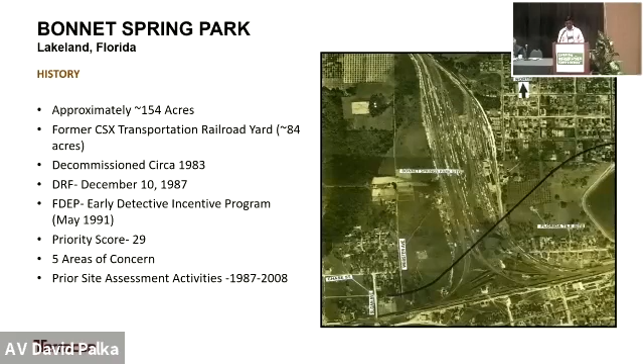A lot of assessment was done from 1987 to 2008, and after that the site was parked. In 2017, Terracon, as the agency term contractor for DEP, was assigned the site under the petroleum restoration program. So Terracon got the site in 2017, and we started the assessment after doing the historical review. You can see the aerial from 1980, which includes the former railroad yard, and also from 2019, which is pretty much before the redevelopment.

You can see the former railroad yard and the 5 areas of concern, which include the former mill house area, former refueling area, an oil water separator area, a former diesel shop, and the former AST area, all at the bottom, the southern end of Bonnet Spring Park.

On the southern portion, there is a pond, which was bought out by DOT and redeveloped. So the property has changed over a period of time, and the boundary limits of Bonnet Spring Park also changed. Terracon went and did the assessment in all 5 areas of concern, for delineation purposes.

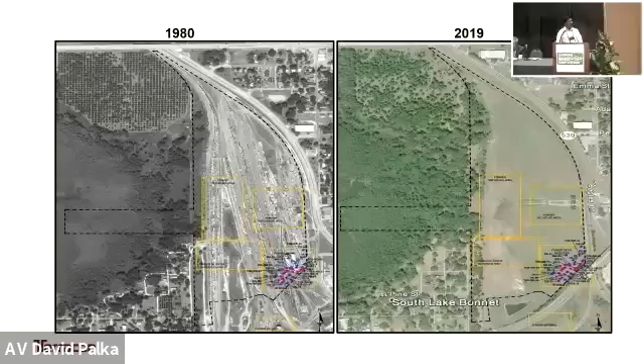We submitted a site assessment report to DEP, and we recommended closure of the former refueling area and the mill house area. For the former AST area, we could not do further assessment because of access limitations to the property, which we could not address within the existing purchase order.

With the oil water separator area, we had to do remediation. But of all the areas of concern, one of the biggest stumbling blocks for us is the former diesel shop area, because the proposed redevelopment includes the welcome center building, which overlays the former diesel shop area. Our focus changed because the client and the developer wanted us to clean the site for them to redevelop the property.

So moving forward, my presentation focuses just on the former diesel shop area and how we addressed the contaminants of concern, secured funding for the cleanup, and assisted with the redevelopment of the welcome center building.

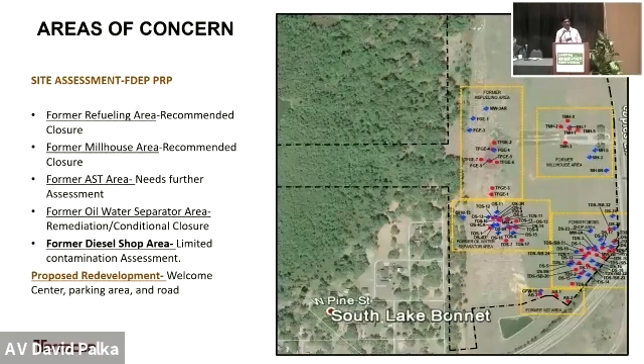Here you can see Bonnet Spring Park looking east at the whole property after grading. You can see the small circle toward the east property boundary, adjoining the railroad yard - that's the former diesel shop area.

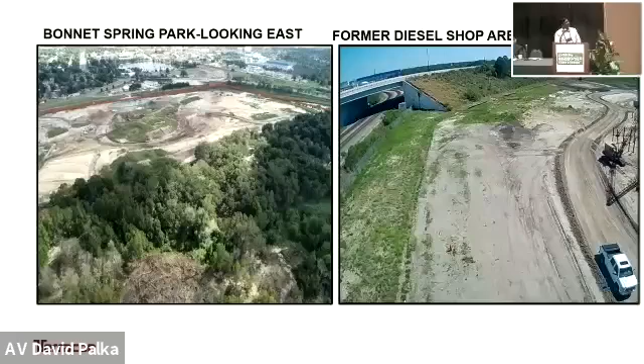And there's another drone shot, a closer shot, looking south at the former diesel shop area.

We did the assessment more specifically in the diesel shop area. We advanced 26 soil borings to 35 feet, to the depth of the monitoring wells, and screened the soils. The contaminants of concern are typically TRPHs.

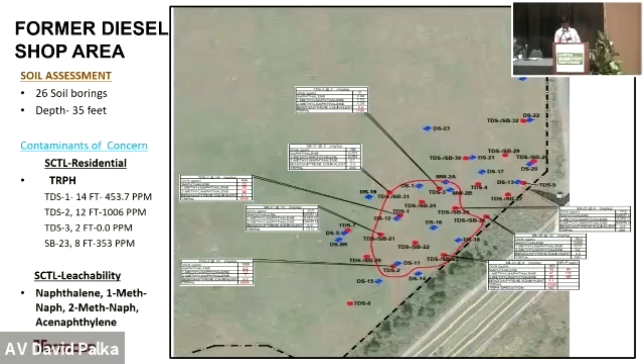That's the plume. For groundwater assessment purposes, we advanced 18 monitoring wells to a depth of 35 feet, with a 20-foot screen interval from 15 to 35 feet, because the depth of water is wide ranging, like 17 to 23 feet. So in order to capture the groundwater table, we used a 20-foot screen.

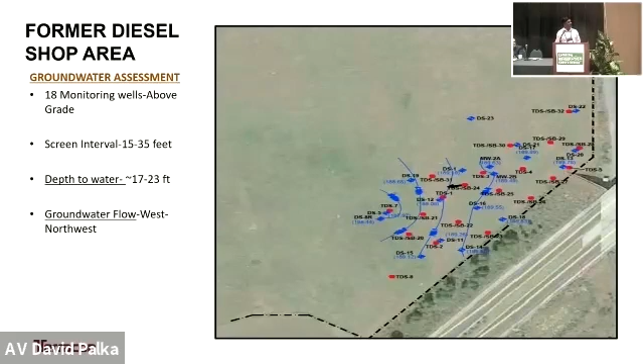We conducted a top of casing survey, and the depth of water is like 17 to 23 feet, and the groundwater flow is pretty much west-northwest.

We analyzed for contaminants of concern, typically TRPHs, because it's typically a diesel shop area, and we have benzene exceeding the GCTL. This is the plume specifically for the diesel shop area.

You can see the property boundary line joining the railroad. Our contamination assessment is limited because we cannot go offsite, as the property on the other side is still owned by CSX, and it's very challenging to get an offsite access agreement for us to proceed.

So since it's time consuming and we are tied to the redevelopment process, we went ahead and gathered enough information to proceed with the remedial approach.

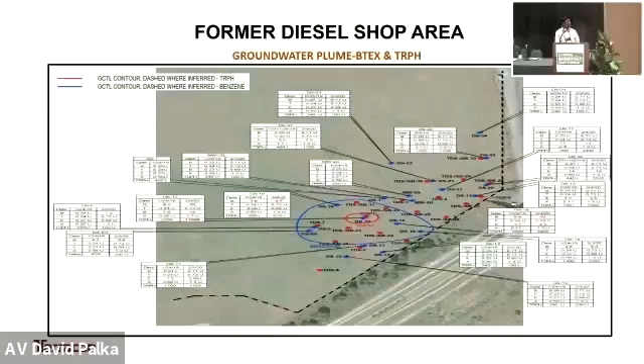Here you can see the PAHs plume. The blue is more like natural attenuation default concentration, and the green, red is pretty much typical GCTL for PAHs. As you can see in the soils, the SCTL leachability for naphthalenes is very, very high, and that reflects on the groundwater - that's the plume for the naphthalenes.

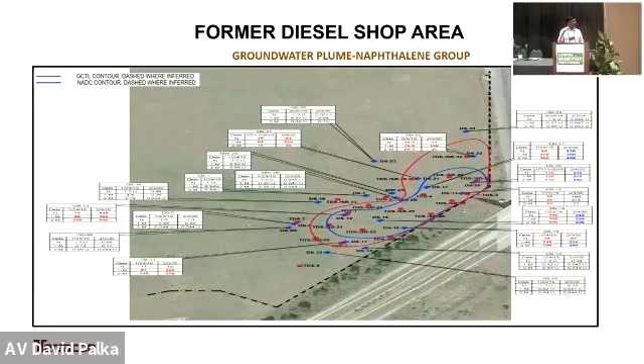We overlaid the proposed welcome center building, the parking lot, and the road over this hydrocarbon plume. You can see the welcome center building, the parking lot, and the roads overlay the plume.

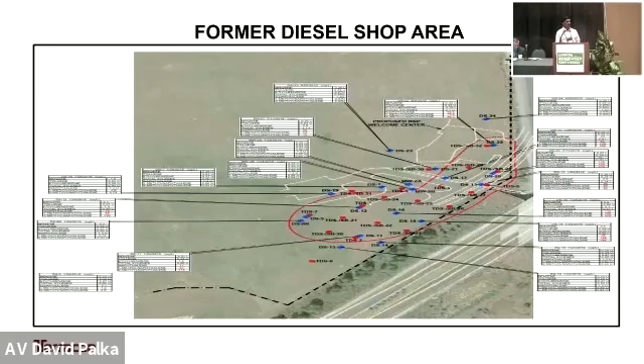We took the whole data and presented it to our client. This includes the lithology.

You can see the wells were installed at a depth of 35 feet on your screen, and the depth of water is 17 to 23 feet. The lithology includes silty clay, clayey sand, and sandy clay, all the way to 35 feet.

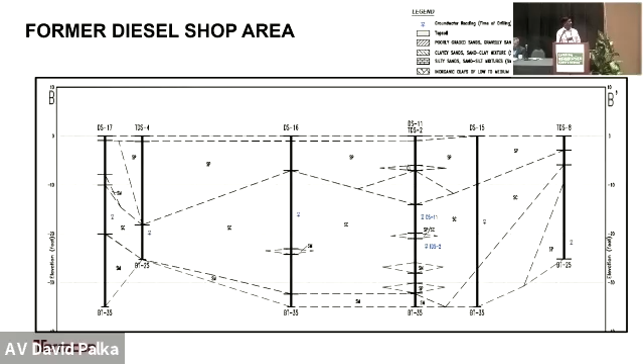Terracon is working for DEP under the supervision of Polk County, and Geosyntec is working for Bonnet Spring Park. So we had a meeting along with Geosyntec and Terracon, including our PE, Donna Klein, with Bonnet Spring Park CEO Bill Tinsley, and also Mr. David Bunch, and presented our findings.

And the first thing they ask is, okay, how can I help you? Help us, more specifically with the funding and the timeline. And they said, if you're going to do any remediation, it should be completed by end of summer 2020.

So we have experience working under FDEP Advanced Cleanup for Redevelopment Program. So we weighed our options. Typically if you go under the FDEP PRP program, since we're the agency term contractor working under the supervision of Polk County, to get remediation of about $350,000 you need to have E-quotes, so that's time consuming. And then we need multiple purchase orders. And the PRP code has limited funding, especially with COVID, the score went up to 65. So had we gone that route, we would not even be funded because the site score is 29.

So we went with the FDEP Advanced Cleanup for Redevelopment Program, which just started in 2017. Under the FDEP ACR program, typically the amount allocated for remediation of any site is up to 1 million for the applicant, and it's one purchase order with no deductible, but it's first come, first served basis. It's not like you submit and you get approved, it's first come, first served. And the program is limited for each fiscal year to $5 million per year, so when you submit the application you have to be within that funding limit of 5 million.

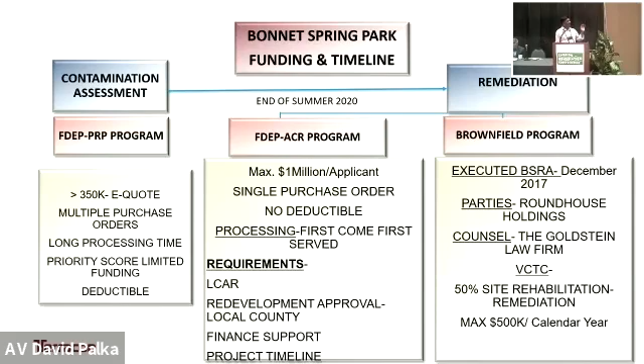So then we thought, okay, this is a good thing - we can have ACR and Brownfield tied together because the cost estimate is 1.2 million. So if approved, we can get a different 1 million for the redevelopment program, and the remaining costs can be claimed as a credit under the Brownfield for that calendar year.

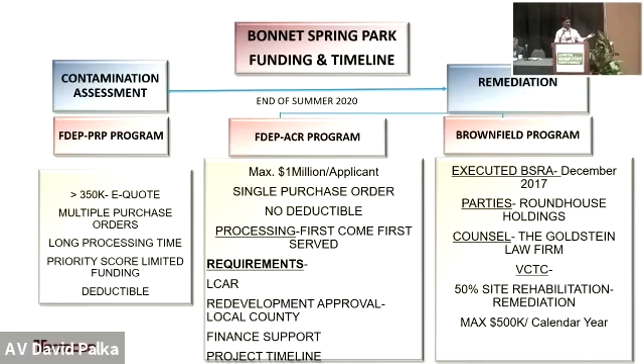So finally, we got a PO in January 2020. We reached out to Matt and Graham from DEP, and Bobby Scarborough and Natasha, expressing the timeline because the redevelopment owners got the permits and are ready to get started. When we conveyed the urgency, they expedited the whole process and had the agreement in place in January. Within 2 weeks of issuing the agreement, we had a PO for 1 million, which includes 8 milestones covering all the remediation cost and 4 quarters of post-remediation monitoring.

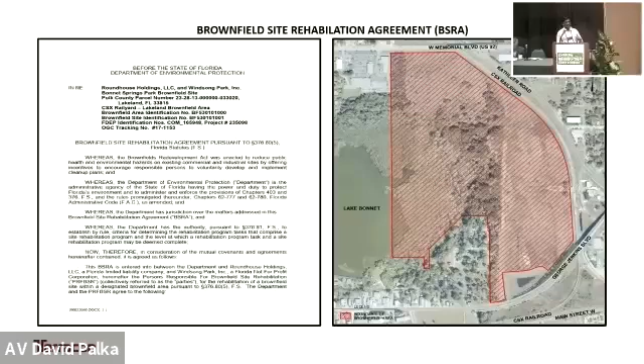So this is the Brownfield agreement. It's for 154 acres for the whole Bonnet Spring Park, and executed, like Todd mentioned yesterday, in 2001 it's designated as Brownfield. With the change in ownership in 2016, they re-executed the BSRA in 2017.

Once we finished all the assessment, and when they were doing the grading, the owner came to us and said, hey, you can't have all the wells which are above grade on site, you need to abandon them. So we abandoned all the wells even before we started remediation, including the other areas of concern.

As part of the grading purpose, the on-site contractor, Rodda Construction, removed the top 3 to 5 feet of dirt from the diesel shop area. You can see the slope. That has been removed when you go under the site.

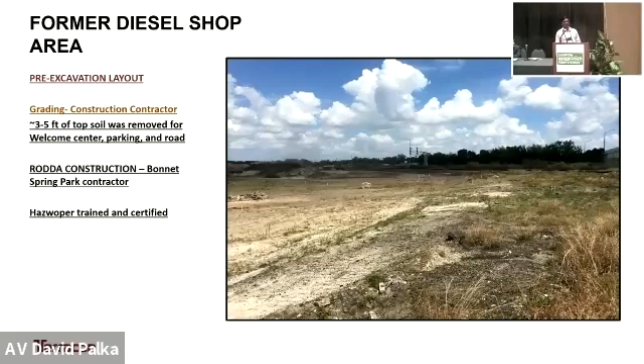To be more effective and cost efficient, we used the on-site contractor, Rodda Construction, whose personnel are HAZWOPER certified and trained. They completed our excavation and soil mixing for remediation.

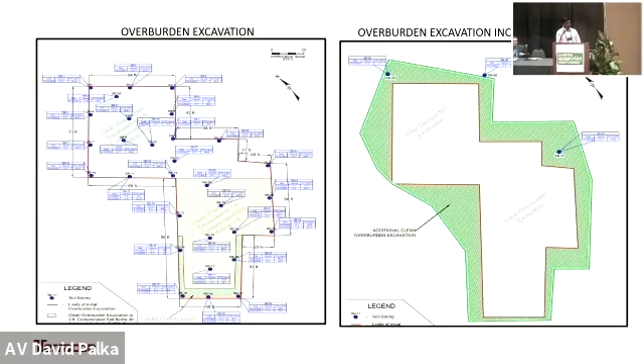Here we removed the top 3 feet of the clean overburden within the excavation area, and also did the excavation with a 1:1 slope, so we removed the overburden including the slope. We staged all the overburden on the south end of the excavation. Here's a picture of how we removed the overburden. Approximately we took 2,000 cubic yards of overburden and staged it on site.

Since the objective of our excavation is not digging all the way to the bottom, we want to dig to the depth of the water table and then soil mix 3 to 4 feet into the water table, because we don't want to do dewatering, which is a tedious process, especially considering the lithology of the site with silty clay and clay sand. So we chose this approach of excavation and soil mixing to avoid dewatering. Also it's an open field with no structures, so we don't do any sheet piling.

First we wanted to determine the depth to water, to determine the extent of excavation. So we put in a test pit, and the depth to water encountered was about 19 feet below ground surface. So we excavated from 3 to about 19 feet, to the bottom of the excavation, and then mixed with Regenesis PetroFix, about 8,000 pounds with the ORC, within the backhoe bucket, 3 feet into the water table. We had disposal of close to 9,000 tons to Heart of Florida landfill.

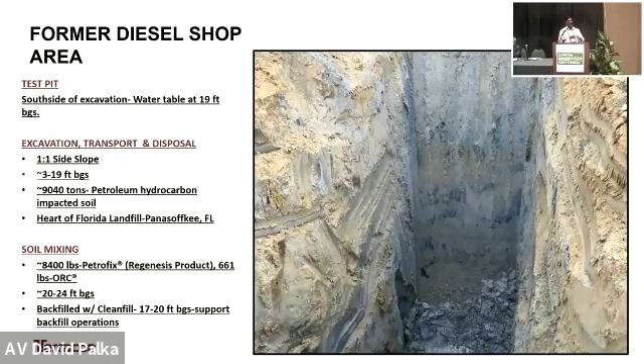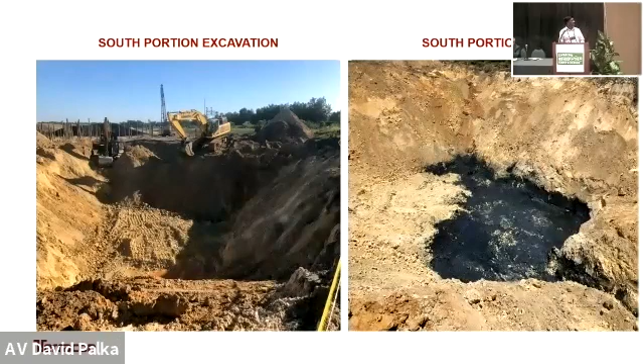Once we did the backfilling and soil mixing, we covered the top 3 feet with clean dirt to provide support for backfill operations, because it's like a slurry—when you backfill it, it's a dark slurry and machinery can't stand on it. So we finished this, the south portion of the excavation. We did it in 2 portions for safety purposes with the 1:1 slope. You can see the south portion excavation at 19 feet with slight water, and also under the same area, soil mix with the PetroFix, which is a Regenesis product, mixed per the recommendations from Regenesis.

And this is the north portion of the excavation. We excavated 19 feet, and disposed of the dirt. We also did the soil mixing using the existing on-site contractor, and we soil mixed 3 to 4 feet into the water table.

We backfilled with clean backfill and compact tested every foot all the way to the ground surface, and it passed a 95% modified proctor test. We used approximately 8,000 cubic yards of clean backfill and the overburden.

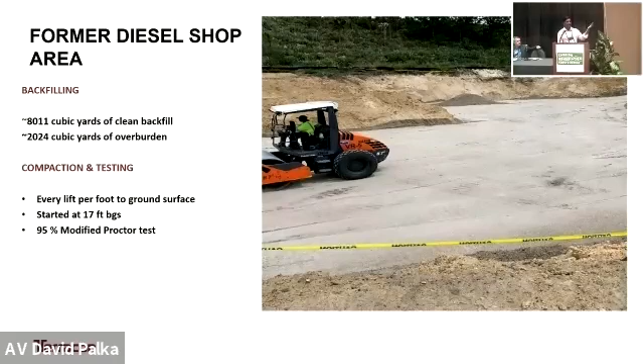And this is what it looks like. We backfilled it with clean sand all the way to the top, and gave it to Bonnet Spring Park for them to start the construction process.

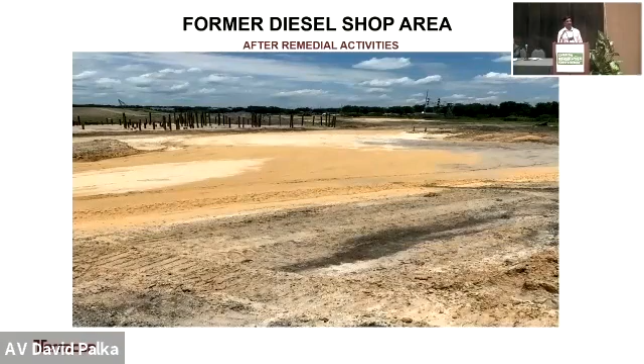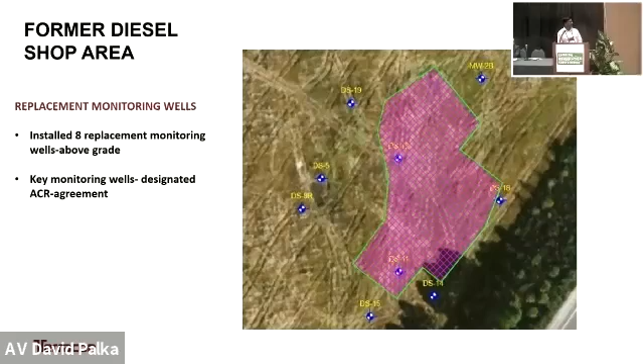We've finished about 3/4 of the monitoring, and you can see the plume has decreased significantly. The only point of concern is the well DS18, which is on the adjoining east of the property, close to the CSX.

We cannot access it because of limited access, since we had a 1:1 slope, and if you cross it, we go offsite of the property. So we're limited for that reason. There's a small benzene exceedance of about 1.5, so it's a slight exceedance above the GCTL for benzene.

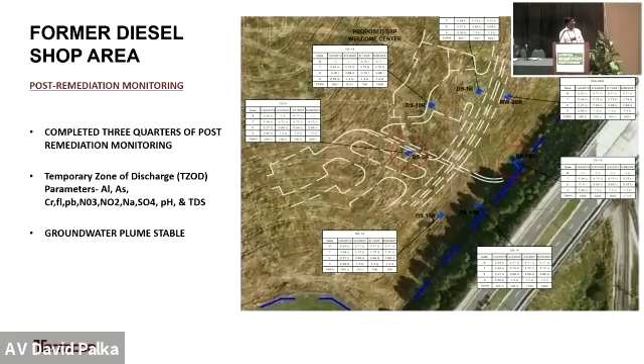That's the current status right now. Finally, as of today, we've submitted and completed the work, completed close to 8 milestones, and reimbursed $980K out of the $1 million approved for Terracon.

On top of that, the $200 grand spent for remediation was submitted for VCTC by the Goldstein firm in January 2020, and was approved. For the 2019 calendar year, they have $500,000, and they got VCTCs from 2017 for $75K and a VCTC for $133K.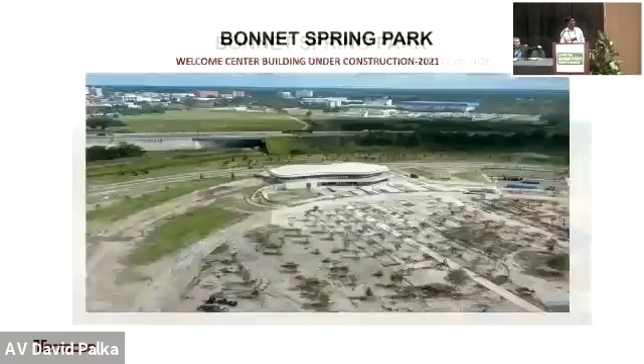And this is what it looks like now. We have the Welcome Center building and the plantations, the road, and pretty much we gave it to them even before they wanted it.

I want to thank DEP, Matt Ingram, Bobby Scarborough, and Natasha for the support in expediting getting this PO, because it's on a tight deadline. Also, thank Geosyntec for helping through the process.

I also want to thank Bill Kinsley and David Bunch from Bonnet Spring Park for really understanding the whole process. And above all, I want to thank my Terracon staff, especially Donna Klein, our PE, and Dan and David, who are no longer with Terracon. We have Ricker and Eddie, who are helping us with the post-remedial activities. Thank you.

Well, thank you, Rama. Excellent use of the available funding and great planning. Looks like a lot of time and planning and effort went into the process. Obviously that's such a large role. It's beginning with the end in mind. And it looks like it's going to be an exciting place to be. I look forward to visiting that. Are there any questions for Rama about the project?

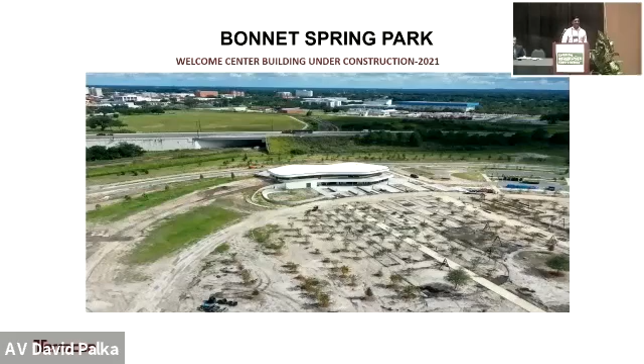No, it's just the 4 quarters, and after that we kind of abandon them, because the whole goal is to stabilize the plume. And we already lost one well above ground with the existing park construction, and we went and replaced it last quarter. Now we would not put it above ground, we flush it to the surface.

And how does the parameters show that? Oh, for aluminum there's an exceedance, but all of the other parameters are within level. So there's a bounce of the aluminum, we are going to look into that. And is the aluminum existing or naturally occurring? I think it's both, correct? Yeah.

All right, we have time for one more question up here. Consider treating the 9,000 tons of material on site. We thought of doing thermal treatment, but when we did the cost-effective approach it's better to dispose, because for our Orlando Sanford Airport project we did the thermal treatment and used it as backfill. So we thought it's more cost-effective getting it done and disposing offsite.

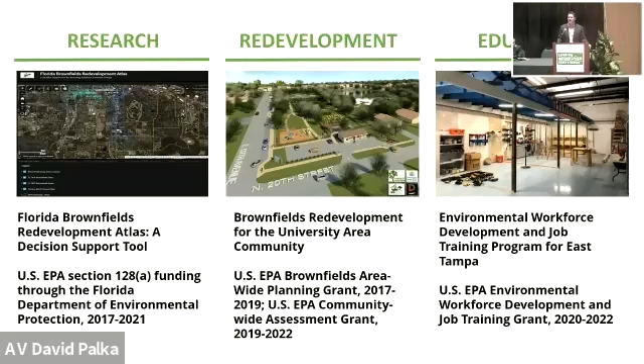We also work in education. We have an environmental workforce development and job training program for residents of East Tampa, and we're toward the end of training upwards of 100 East Tampa residents in environmental health and safety and various OSHA standards, helping them get jobs in the broader environmental industry. A few years ago I was approached by EPA and DEP, and they were interested in better understanding the impacts of the state and tribal response program, which is part of the Brownfields program at DEP funded through CERCLA Section 128A funding.

It takes the form of two different programs at DEP: the Targeted Brownfield Assessment Program, or TBA, and site-specific assessments. DEP's Brownfield program provides funding for assessment and remediation of brownfield sites through a competitive application process. Both organizations, EPA and DEP, were really interested in the efficacy of that program.

What happens when people take advantage of those resources? Do the sites get redeveloped? How long does it take? Does it have an impact on the community socially, economically? What happens to the environment? It's sometimes hard to follow up 10 years later, or however long it takes sometimes to redevelop brownfield properties. So they asked me to come up with a way to do that.

And so I created the Florida Brownfields Redevelopment Atlas. It's really just basically an online GIS tool. I think it's easy to use. It's free, it's open to the public. You can find it at our website at usf.edu brownfields/brownfields, or on the FBA website or DEP's website.

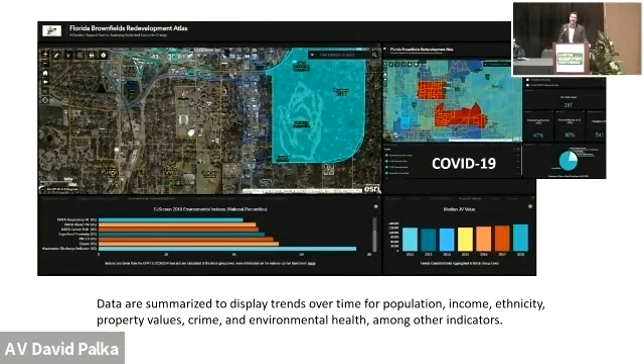We've also started to incorporate COVID-19 infection and death rate data so that you can track the health of communities that you're working in. The data come from all different sources: the National Historical Geographic Information System, the user interface, though, it's Google Earth. It's got American Community Survey data from the US Census Bureau, statewide parcel data. There's everything that's available publicly from DEP, and a lot of information from EPA, the EJ Screen tool, and many of the other databases that EPA has been releasing over the years.

What's unique about this particular tool compared to others available for Florida and the Southeast region is an emphasis on social and economic data, so that when you redevelop a site, you can look at social demographics in the community before, during, and after redevelopment. So you can really tell, is this redevelopment project a catalyst for additional development? How does it impact the health and wealth of a community? There's a lot of demographic, economic data. We have new economic data on total businesses, total employees, total payroll data. So you can really track economic impacts of brownfields redevelopment also.

Data are only as good as the people who enter them. So we wanted to spend the past couple of years ground truthing the atlas to try to see, is the atlas able to make predictions that are useful, or characterizations that are useful, about the redevelopment of the site.

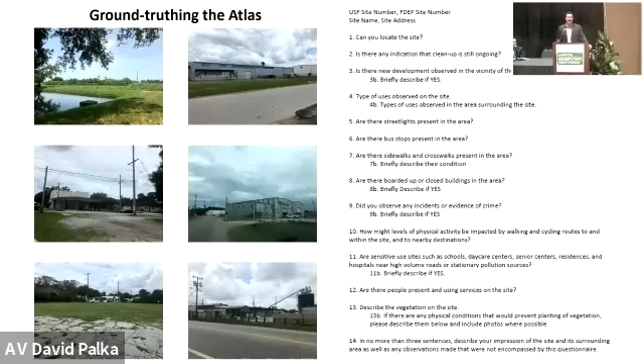So we went out in the car and drove all over Florida for the past 2 years, and we visited about 100 sites that have benefited from this program. I have seen so many abandoned, vacant lots, parking lots. There's some really great redevelopment projects, but there are others that just stall for years.

We collected data using a questionnaire that we would fill out for each site, take photos, and then we would talk to property owners. We would talk to people in the neighborhood and ask them about their memory of redevelopment of the site, and sort of interview them. So we have a lot of quantitative and qualitative data for each of these 100 sites, and all of that's being entered into the atlas too.

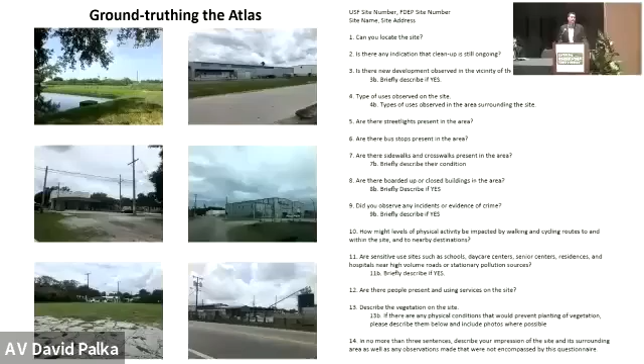I'll just give you a couple of examples. We have a simple return on investment, ROI calculator, that the atlas is able to use. This example is from a former wastewater treatment plant in North Palm Beach. The atlas calculated a 10, on a scale of 1 to 10, return on investment, and our site visit confirmed that through the questionnaire and through interviews.

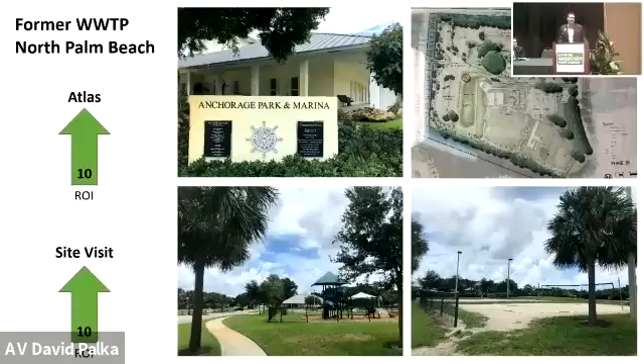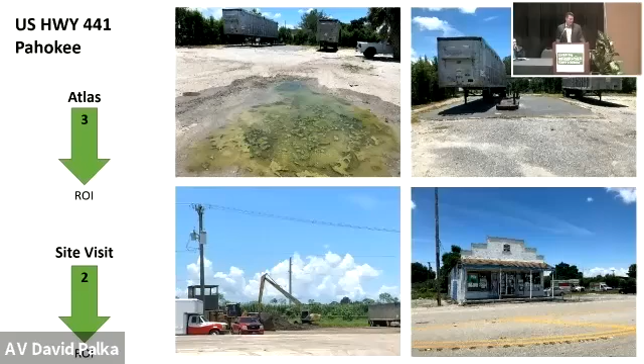But our site visit did not support that. We were very curious to understand why this particular property, which had received assessment and remediation funds, was not being redeveloped. There weren't very many people around, but there was a fast food restaurant next door, and I was kind of hungry, so I went in. I hadn't heard of this before, but it's called Whataburger. Has anyone had a Whataburger? I don't know, so I went to the Whataburger to see.

The owner happened to be there, and I asked him if he knew anything about this property. He said, yes, in fact I bought the property some years ago and benefited from the state Brownfield program to clean it up. I said, well, what are you going to turn it into? He said, well, nothing, I'm just going to leave it vacant. I said, why? He said, because Wendy's was going to buy it and move in next door, and I didn't want that to happen, so I acquired that property, and now it's just going to sit there. So you never know with these brownfield redevelopment sites what's going to happen.

Getting out and visiting these sites has become really, really interesting. I have too many stories to share.

We also track usage analytics, and a lot of the usage is increasingly by local governments that are using the Atlas either to plan redevelopment or to understand changes in their community, and also to apply for state and federal funding. Universities are using it increasingly for teaching and research, and we see a lot of developers starting to contact us and ask questions about how they might incorporate this into their development plans.

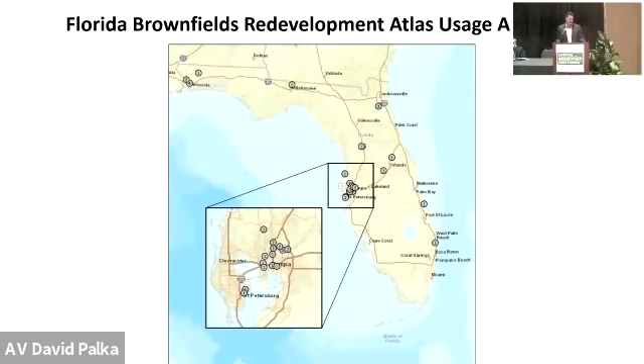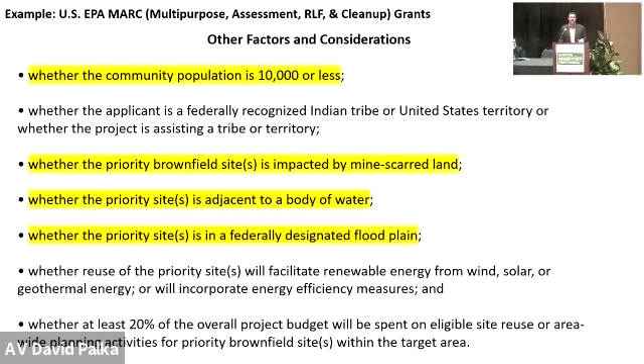I wanted to give you a couple of quick examples of how people use the Atlas. Many local governments are starting to use it, and nonprofits, to apply for EPA multi-purpose assessment and cleanup grants. We've constructed some parts of the Atlas to give specific information that EPA asks for on those RFPs, not just in the application, but other factors and considerations that can sometimes add bonus points to your application.

Some nonprofits are using it to apply for state and federal resources. This is one example called Harvest Hope Park. This was a 7-acre brownfield property near the university area near USF in Tampa, and they made use of the Atlas to help redevelop this particular park. It was a 7-acre property that was an informal landfill.

It had been used previously as a police athletic league back in the 50s and 60s, and there was some arsenic application that happened back then. It's surrounded by light industry, so there was evidence of some lead and arsenic from that light industry and hazardous waste.

So they redeveloped it into a park with the community, and they used the Atlas to help design and develop where they wanted to put different amenities.

My favorite part of this project was we did a charrette with a local elementary school and asked the kids to help us design the playground. They got out their crayons and drew these fantastical things. They wanted a swimming pool, a splash pad, ponies and a barn. We couldn't give them all of those things, but we gave them a slide. They love it, they love it.

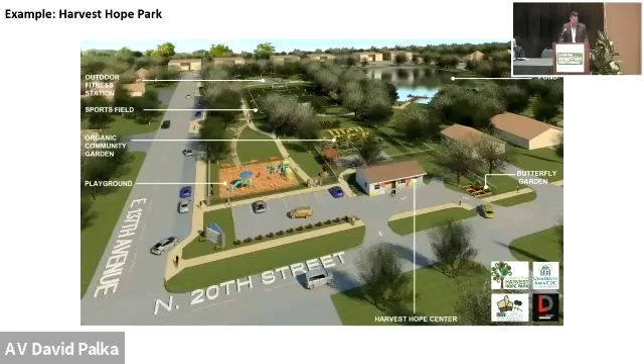It's been a real catalyst. We've used this as an example with the Atlas to try to track how a redeveloped site can catalyze additional redevelopment in the community. We're tracking other organizations that have come in now and are redeveloping areas around the park. Habitat for Humanity has created a number of houses, and another nonprofit has come in and is developing affordable housing for the community.

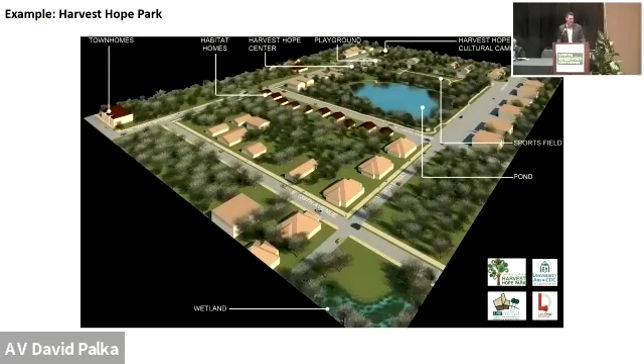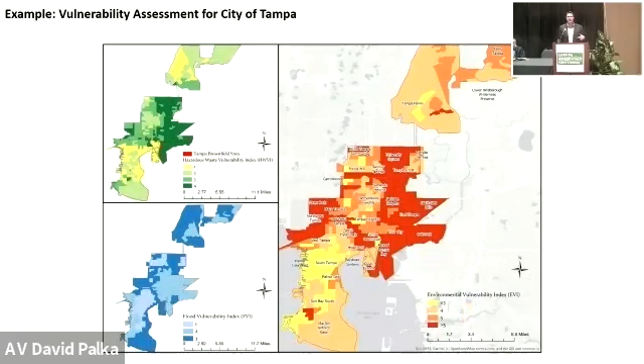Another example is we were contracted with the city of Tampa to conduct a vulnerability assessment. We used a lot of the data to do statistical analysis and create GIS overlays to track the location of brownfield and Superfund sites, how they interrelate with flood zones, and how that interacts with different demographics and neighborhoods. We were able to identify very specific neighborhoods that were most vulnerable in terms of hazardous waste, flooding, and different climate resilience aspects the city was interested in.

Finally, we're now working with the Florida Brownfields Association, particularly the Environmental Justice and Public Health Committee, that wants to get ready for all of the federal flow-down resources coming from, presumably, the Infrastructure Act that was signed recently. They're interested in identifying throughout Florida, as best as they can, at least one community in every county that has environmental justice challenges. We've used the Atlas to identify the location of all brownfields, and then where we suspect brownfields are, based on information from the Atlas.

Now we're going to be getting back in the car and driving around Florida, looking for nonprofits and local governments that can help us identify communities with environmental justice challenges that can take advantage of some of this infrastructure funding. All right, I've said too much.

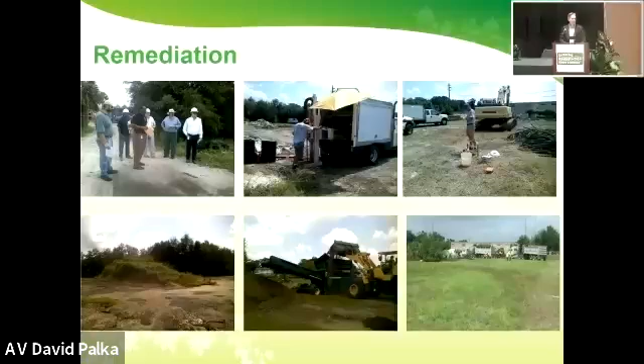And that is it. I'm happy to take any questions.

All right, a couple of points on your talk to close and round things out for the discussion on redevelopment. Pay attention to the soil blending guidance document that DEP currently has in draft form, available on the DEP website for review. Final comments are due December 31st to the DEP. We are working as a technical committee for Florida Brownfields to provide our comments, but any association or individual can provide comments on that - same time frame for the soil management plan guidance documents.